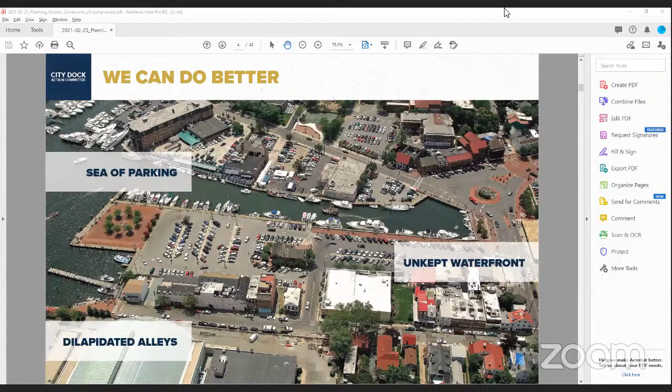We are using our resources, that is Hillman Garage, to construct a long overdue infrastructure to protect us for decades. I think my only regret about this is that the project managers and construction keep getting younger and younger than me. But other than that, I really look forward to you meeting the team. And thank you again, Eileen, for putting this together.

Oh, Ellie, thanks so much. Yeah, it doesn't, I have to just say, it doesn't get better over the years. Everyone gets younger. So Robert really set the stage for us.

When the City Dock Action Committee came together, which was less than 2 years ago, the first thing everyone did was we took a look at City Dock. And as you can see from this image, we said, this is our 100% corner. Look at it. It's a sea of asphalt. It's a parking lot. It's an unkept waterfront.

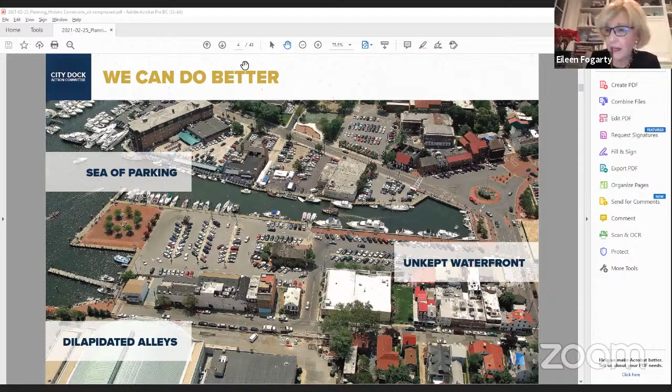This is the ongoing and increasing flood risk to downtown. In 1969, there were less than 4 flood days a year. By 2013, there were 38. In 2019, 52 flood days a year where downtown was impassable. And by 2065, we anticipate that it will be every day, 365 days a year. So this was a call to action for all of us because the situation is urgent.

The city no longer can kick the can down the road. Next slide, please.

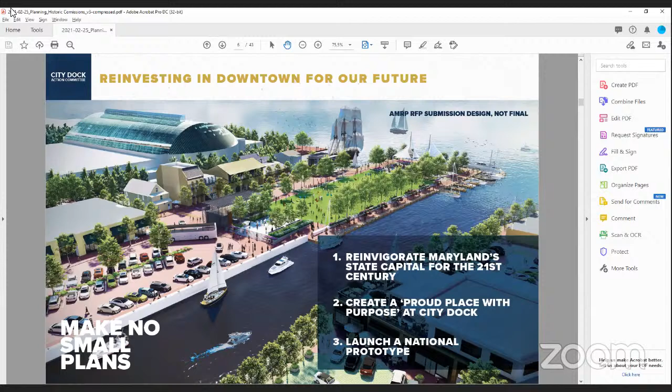It was interesting because in the past there have been a lot of groups that have done good work, but it has never gelled. I think the combination of the challenges that the City Dock group was faced with, people embraced that and said, this is a challenge, but it's an opportunity. It's a real opportunity to reinvigorate our capital city and create what would be a very proud space. So it was out of that energy, which dates to a little less than 2 years ago, that the whole effort got underway.

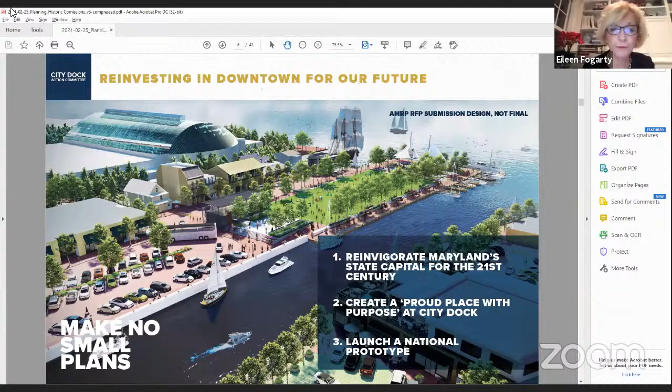I'm sure many of you have heard or been involved in this effort. The purpose of the City Dock Action Committee was very clear: create a broad-based consensus throughout the city for the future of the City Dock and identify clear actions rather than a more conceptual plan—a clear path forward.

92 citizens, business people, financial experts, preservationists, resiliency experts, parking experts, and maritime interests all came together and spent a very intense 8 months. During that time, they not only met with their own working groups to come up with specific recommendations, but there were also 22 meetings in the community, so much of the business and residential community in our historic district came along with them.

The whole effort started with ULI saying, here are some general things, a general direction. When the action committee got together, they identified guiding principles. I'll mention two: number 1 and number 4. That is, to enliven the entire pedestrian experience by creating an inviting green space with access to the water, and, very importantly, to preserve and enhance downtown Annapolis's maritime heritage, its authentic character and view sheds by honoring the existing building envelope and the maritime focus.

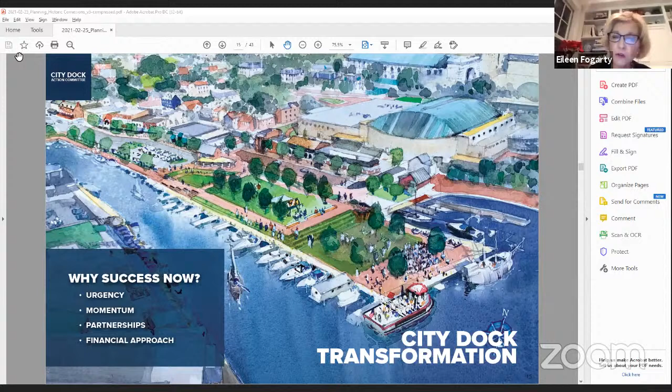The momentum that came not only from all of these people on the City Dock, but from the outreach—the 22 community meetings, the engagement, the partnerships. Historic Annapolis and the Park Service have been terrific through this process, along with the Naval Academy and Anne Arundel County, and having financial experts on this group to help set a direction and identify a resiliency financing authority for the future.

So with that, I want to turn it over to Bryce. Next slide.

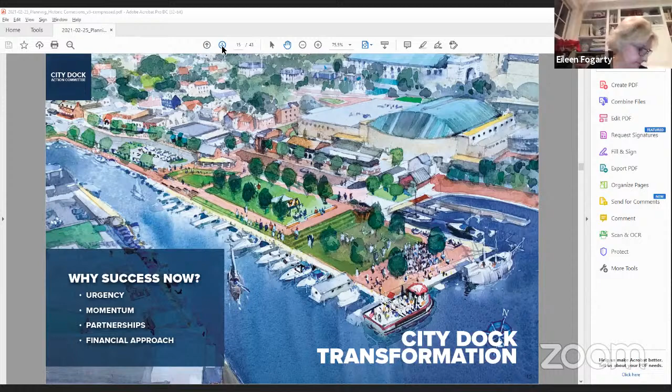This is very exciting, we're getting very close. We're in the early days of a very long process, but we've made incredible progress already, as Eileen outlined. This diagram on the screen is kind of our consensus plan, as we like to call it. It's not really meant to be a site plan, but it does represent a lot of thinking from a lot of different people. While I had the honor of being on the ULI technical advisory panel, I also got a chance to work with the action committee, and I co-chaired the design committee along with Leo Wilson. We had a lot of great folks on that committee: Michael Dowling, Chris Shine, landscape architect Jay Graham, and Michael Beatty, a developer who lives in Annapolis. Some really great thought came out of that, and a tremendous amount of time was put into developing this plan.

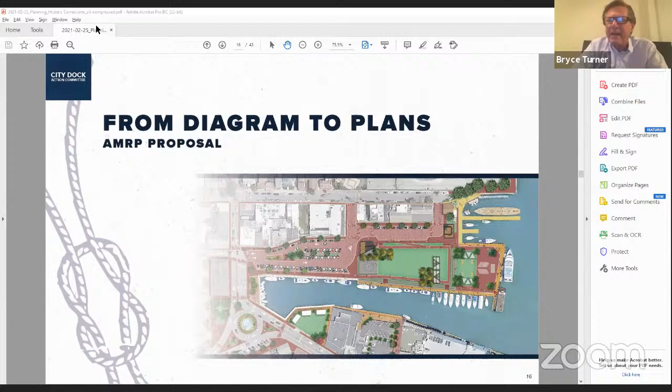Next slide, please. But before we talk more about City Dock, this Hillman Garage is what's going to make it all happen. This is really the trigger for making City Dock happen, by getting a more efficient Hillman Garage, one that can house more cars. This existing garage, I think we'd all admit, is near its useful life. It's an eyesore, and probably becoming somewhat dangerous. It's about 3.5 levels, I think 425 cars currently, and we need to get that up to about 575 cars approximately.

Next slide, please. One of the things we noticed very early on was along Gorman Street, the side closest to Main Street, is that we have the opportunity maybe to activate this facade in some way. This was at the challenge of the city. We were trying to think of ways to adaptively reuse this building, whether it's 5-10 years from now where these could become storefronts, or whether it's on weekends or times when the legislature is not in session, we could create flea market space, or food market space. There's an opportunity to do more there - it could be an art festival, art in the alley, if you will. So we're looking at some ways to activate the street. This was a very early design that was part of the proposal.

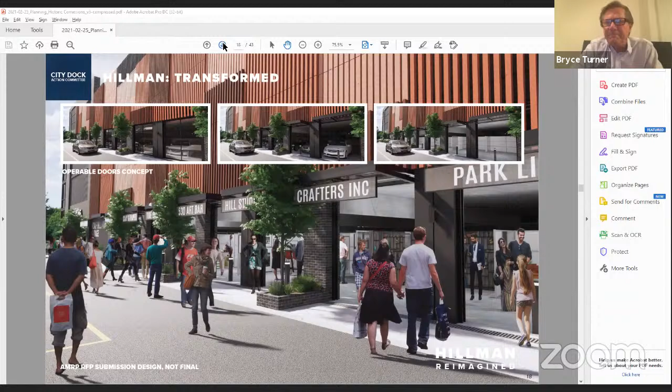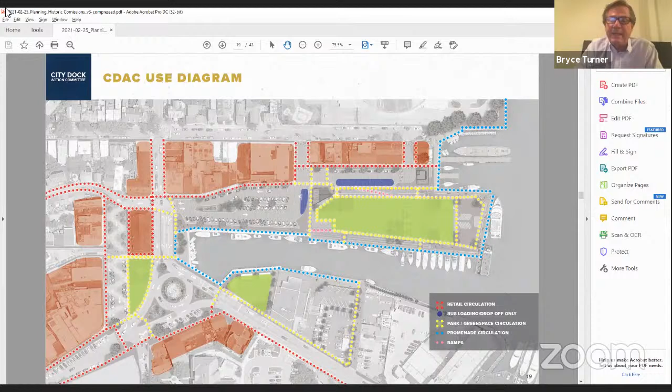So that promenade we felt was very important to be extended the entire length of the harbor, every bit of waterfront possible, and even hopefully being opened up at the Fleet Reserve at some point. We also thought about the pedestrian circulation from the Market House along Dock Street, along storefronts, and how those could be improved. But also thinking about how a green park that is elevated to provide the major flood barrier could also be an economic development tool for this community, and really start to leverage investment in some of the adjacent storefronts that really need it, quite frankly. Next slide, please.

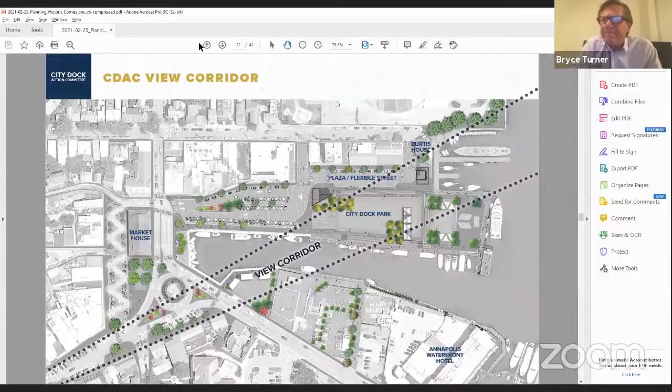Next slide. And this is the Sanborn map, 1897, where you start to see some of the structures that were there previously.

We think there may be an opportunity. One of the things that we kicked around in the design committee was whether or not a skeletal remnant of some of these older buildings could provide a frame structure for shading. So those are some of the things that we're studying.

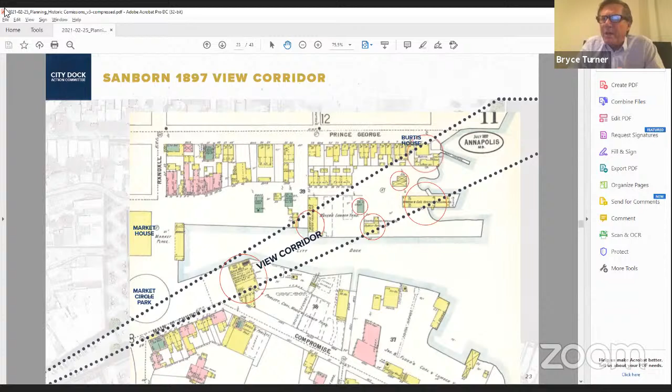Next slide. So this was the plan that AMRP developed as part of the proposal process. And of course, this is done somewhat in a vacuum, but we had the tremendous opportunity of building upon the action committee's work. So obviously it's not very different at all from what the action committee had developed in the consensus plan.

The major components of this, of course, at the very top right, you see the Burtis House labeled B. Just below that, label L, would be the adjacent building that would tie into the Burtis House in some fashion, as has been recommended by the recent report that's come out, and could have some harbor master functions in it. And it mostly is for viewing, of course, the harbor. We think this vantage point is a good one.

Moving on down the plan at label H, the Susan Campbell Park becomes modified in some ways and renewed. The elevation is brought up a little bit, maybe an opportunity, a better opportunity for some shading there, and games and programming, and the ability for people to walk to City Dock and dip their toe in the water, if you will, which is something we heard throughout the entire process.

The major function at the park, however, will be just that, an open park shown here as F, which will allow the boat show to continue its operation throughout Susan Campbell Park and the Green Park. We have the opportunity for some bus drop-offs for the boat tour functions that are happening there.

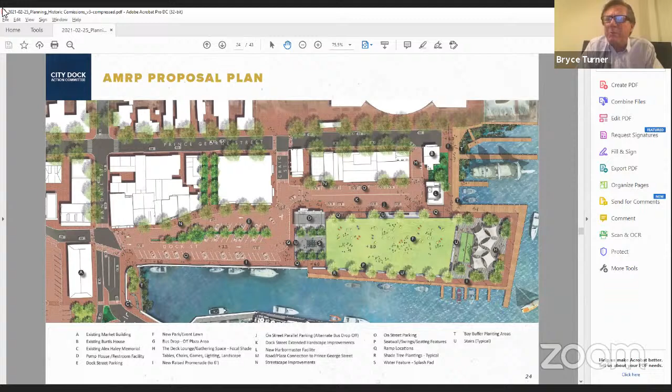That is a good part of the nuisance flooding that we have actually comes up out of the drains from below. It's not actually coming over the bulkhead, but in some cases under the bulkhead and up through the drains. And this will be a place where we can locate those pumps. Next slide, please.

And so when you really view this in 3 dimensions, and especially from this vantage point from over the water, you really see obviously that sea of asphalt. And so it's going to be a really no-brainer, we think, to make the kind of improvement that you get when you look at this next aerial on the next slide.

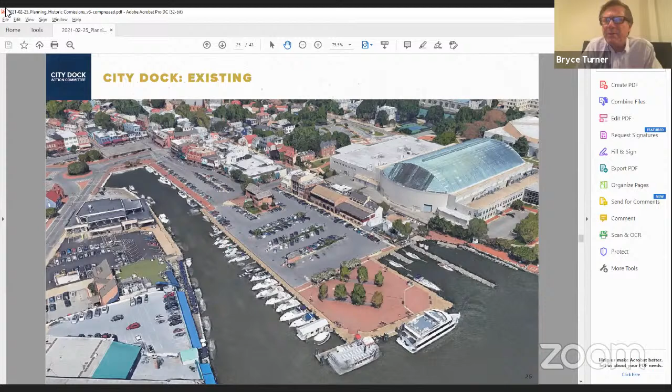This starts to give us the opportunity to keep the existing slips that we have there, but to get an incredible green space that will be elevated approximately 5 to 6 feet above where the existing surface parking lot is, especially closest to the water, which will give you an even better view out over the water. We think it's going to be very exciting.

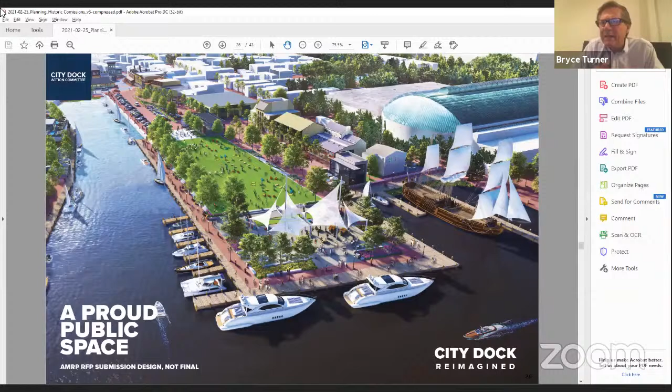Again, I think some shading is going to be needed here. The promenade will be enhanced along its full length. In this image, you can see the Burtis House on the right near the Naval Academy, and some type of structure that we would build for the harbor master adjacent to that.

We think that this incredible view that people are going to still have when they arrive from Main Street will really be enhanced by the green surfaces that they see, the additional brick that we would be including. This particular slide shows some memorial circle and some potential changes there, although that's currently not in our scope of work, I want to point out.

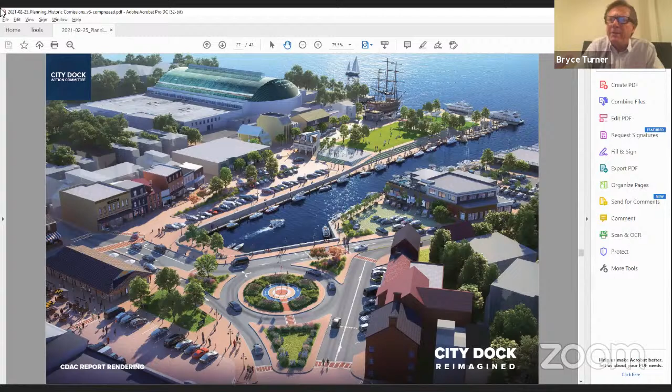So as we drill in a little bit closer, you start to see a fountain, potential splash park that a lot of people felt strongly about on the action committee. You start to see some of the steps that raise up to that green elevated park. And there, although you can't really see in this image, some enhancements to the bulkhead on the lower left side of the image.

So the pump house and the restrooms will be a small portion of the existing Harbor Master building. The thought was, because of the incredible amount of utilities that come into that building that largely help the boat show, we would keep one portion of that building and repurpose it for the pump house and for toilets, and then possibly have an upper level viewing deck on top that could be used for some small functions.

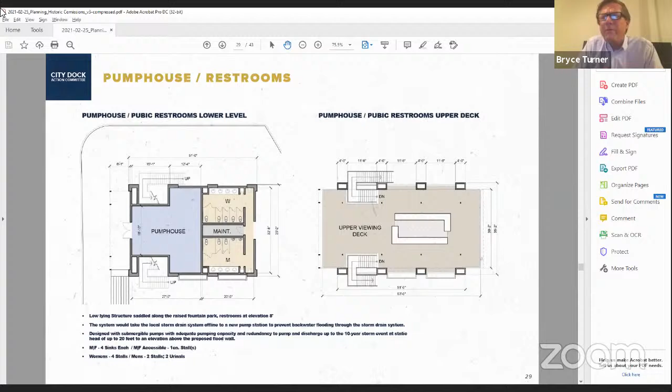And just looking back at the other direction, we want to keep this building very light and airy as much as possible with some proportional scaled openings.

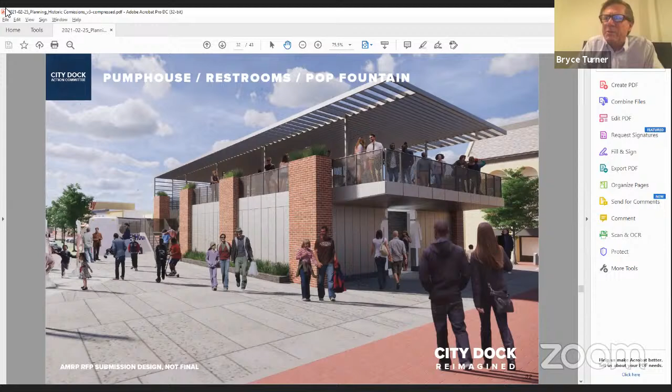And one final view of that, looking back towards Market House. Again, you see the opportunity for some type of second level observation deck there that I think could be very interesting, as well as the entrance to some public toilets, which I think are very important at City Dock, and any successful urban space really needs those public facilities.

Next slide. And then this is an image that we created for the Harbor Master building, which would sit adjacent to the Burtis House. My guess is the design of this is going to change considerably probably, but again, brick and steel and being as friendly as we can to the Burtis House, but making sure that no one mistakes this for a historic Annapolis building.

So those are some of the studies that we've done. This will be the work that we have in front of us, is to develop these designs, to work with HPC and the city throughout this process. Again, we're very excited to be doing so. And I believe that's my last slide, Eileen.

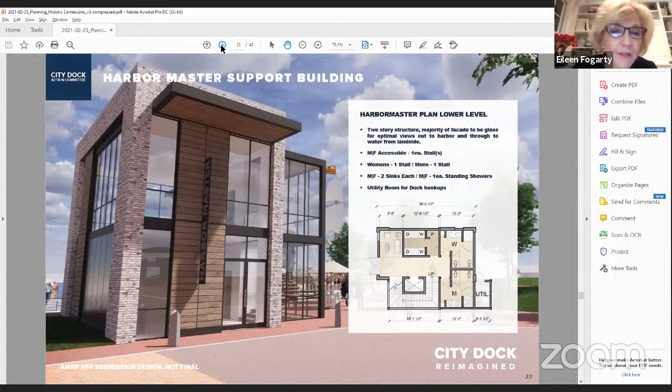Before you all get to meet Eivind Dueland, who you will enjoy working with as much as you have enjoyed working with Bryce Turner, I wanted to just give the commissions some background on how we hired AMRP. Starting in the summer of 2019, there was a very rigorous process put in place, a competitive process for RFQs, RFPs for Hillman and City Dock. And nationally, 5 nationally recognized firms competed in that process.

Out of that, last summer, 2020, AMRP was selected. As soon as they were selected, the city brought on a group called CBRE, a highly regarded contract management and contract negotiation firm, and they worked with the city and AMRP to bring forward the pre-development agreement that is in place now.

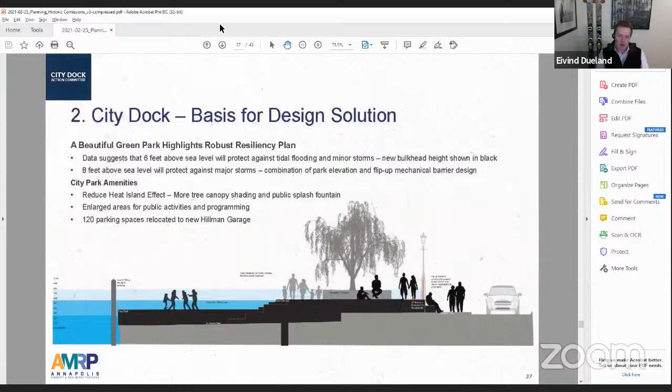The other thing that we want to do is ensure the parking spaces that are lost at City Dock are then picked up at the new Hillman Garage.

Just as we're developing the designs for City Dock, we're further developing the designs now for Hillman Garage. What we will be doing here is developing a design that fits within the existing footprint of the current garage. As I mentioned, we'll pick up the parking spots lost. We want to keep the vehicular entry and exits as they exist today, both on Gorman and Duke of Gloucester Street.

We're excited about how the ground floor and other parts of the facility can be used for other purposes for the garage during certain periods. Pop-up vendor and artist space, as Bryce mentioned, is something that can definitely help reactivate Gorman Street in particular.

We're also undertaking a parking study to outline the demand and need to right-size the garage facility, and to understand the parking dynamics in and around Hillman and the City Dock area as a whole.

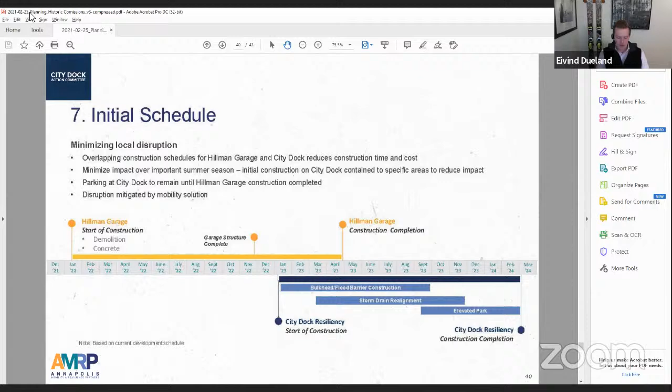We just wanted to give a brief overview of the process we're going through in the PDA process now. We're in what's deemed the feasibility review, which is further developing the designs and solutions that we did as part of our initial proposal, studying the parking demand, and doing some initial review and further development of the financing plan, before we then define the program and start the more traditional project development, narrowing down the design solutions and estimation of Hillman Garage and City Dock.

The reason I wanted to bring this up is while they are two different projects, and Hillman will be running a little bit ahead of City Dock, as you just saw from the schedule, they are very much interlinked when it comes to revenues from Hillman Garage, which will be used to develop and construct City Dock. So they're very closely linked in a symbiotic relationship. We're completely dependent on putting some parameters around Hillman so we know what we can do at City Dock, both from a scheduling standpoint and a cost standpoint.

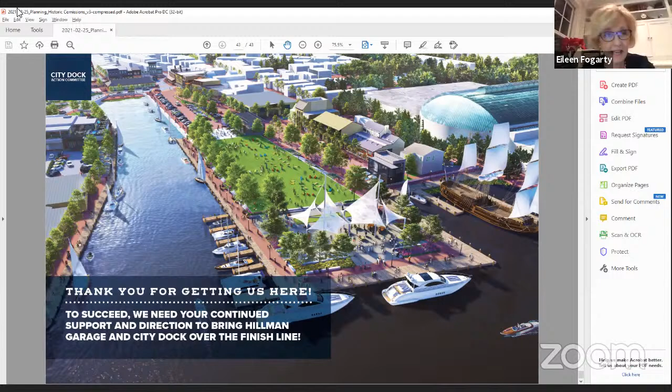Yeah, well, thank you, and hi everybody again. Obviously, as an old public works guy, this is a very exciting project for me, so we can't wait to get started. Thank you for inviting us to the meeting tonight and for having the joint meeting. I think this is a great format. What a great team we have. Thanks, Eileen and Eivind and Bryce. Your presentation was superb and we appreciate that. We think we have the right team. We think this is the right project. Now we just need the public to give us the input we need for the design of the project.

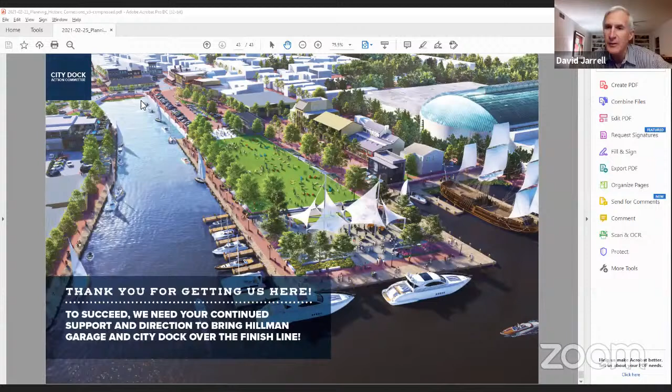But we're really excited to get moving. As Eileen mentioned, this is the very beginning of it. We thought it was important to come to you all to get you up to speed on what's happening, because you're going to see much more of this project in the future. But we're just really excited, and hopefully we'll have a chance to answer some questions if you have any, but I'm sure Eileen will turn that over to you in time. So thank you.

Okay, Eileen, are we ready for some discussion, some conversation? We are ready. All right, great. Who wants to start? I could make maybe a suggestion - our guests from the Planning Commission may have questions, and excuse me if I'm misrepresenting, but you're at a higher level of planning than we are at the HPC. We tend to be very single site oriented, so this is a big project for us, master planning. But I'll turn it over to anyone from the Planning Commission who'd like to ask questions. Mr. Chairman, may I? Yes, of course. Well, you've been there, so you tell us. Well, no, I'm not going to do that, but they've already had a shot. Just saying. Okay, well, warning you about certain members of the Planning Commission, really. Well, I'd still like to extend the courtesy as our guests. I'm just kidding. Okay, good enough. Questions from anybody on the Planning Commission?

I'll jump in first, if no one minds. One of the things we talked about at our last meeting, when we were briefed on March 5th - we did that in person, if you recall, it may have been one of our last meetings in person - one of the things I mentioned was enhanced facilities for boaters. I do a lot of sailboat cruising, and one of the things that's really important to me when I get to a new city, especially with a nice seaport, whether it's Mystic or Maine, you really like to get off the boat and take a shower. I couldn't help but notice there's one shower stall for men and one for women. So is that just the initial idea? You will be enhancing this, correct?

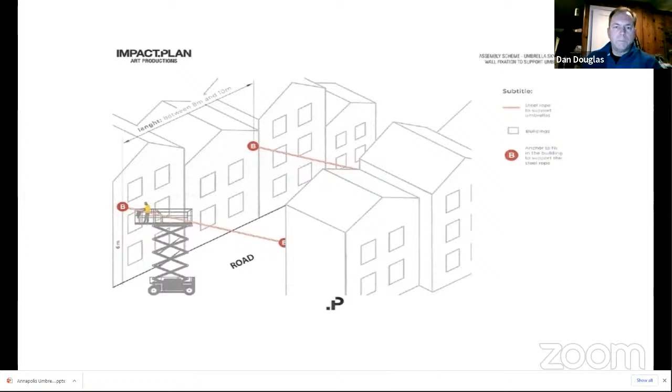So the wires - there are going to be 7 wires spanning across, and then there are, I believe, at least 11 wires that run the length of Maryland Avenue. The challenge is to find suitable spots to anchor the 7 cross wires.

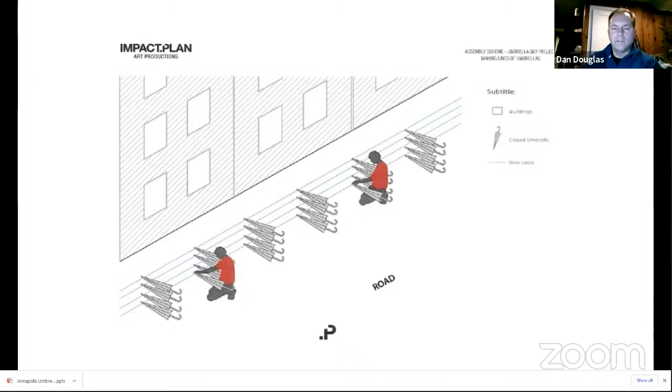This is simply a diagram from the vendor showing the process of installing these. They provide all of the parameters for the distance between the longitudinal wires.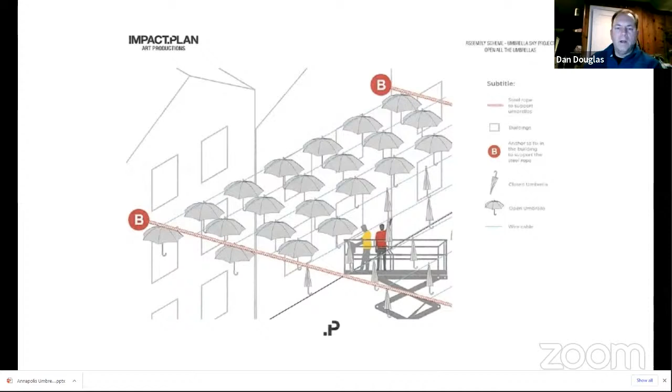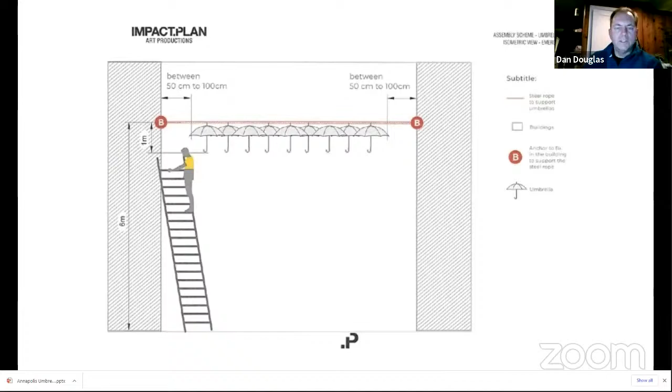The height of these wires is also controlled in this case by fire safety needs. The fire department needs 14 feet of clearance underneath these umbrellas. The umbrellas are 3 feet tall, so the wires will be at least 17 feet off of street level. There's a diagram of that, and obviously it's in centimeters.

In this slide, you can see the solution to the need to quickly remove this installation in the event of a fire. The solution the vendor provides is to simply cut the wires. We talked to the fire marshal a couple of times about this, and it's not that the fire department can't do it, but it's going to take some time to get a ladder off the truck, get it positioned, and bring the ladder up between wires. It would take a fair amount of time to cut 7 wires, or at least enough wires to drop this to the street and drag it out of the way.

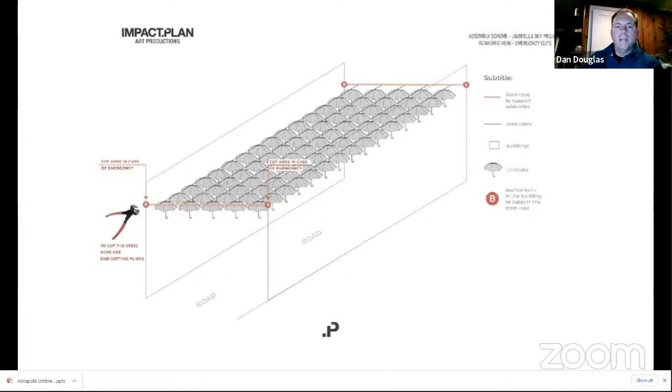This is what they consider a quick release system - what's provided by the vendor if you allow them to install every detail. It's simply a carabiner clip. But again, that requires getting a ladder and getting access 17 feet up in the air, and the fire marshal is not comfortable with that.

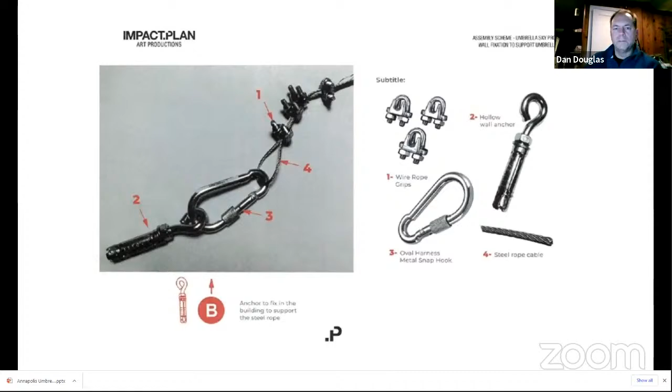The 7 cross wires - the arrows in this diagram indicate the anchor points. You see that every anchor point in the diagram is on the side of a building. We're planning to anchor not to the front face of a building, but to the side, for two reasons. The strength of the anchor point will be better if the fasteners are perpendicular to the direction of pull - it's much harder to pull something out perpendicular than if the fasteners were parallel to the wires. So the challenge has been to find locations on the sides of buildings where we can anchor with access and at the right height.

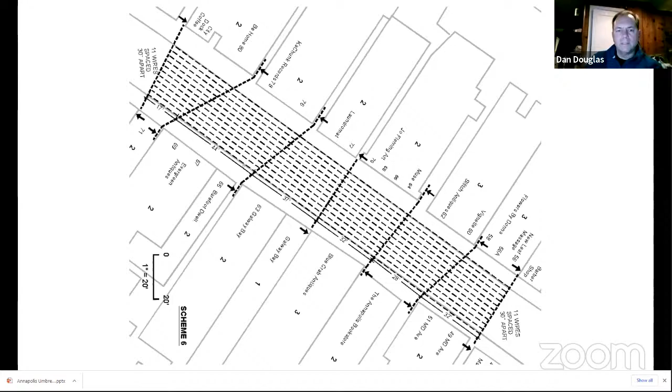We're going to, as soon as we can, do a test run of these - get the fire marshal out with a pike pole and see how easy it's going to be to actually quick release these and drop them into the street. This is a simple diagram of the concept I'd like to try in our test. The bar has at least 2, and we're probably going to expand that to multiple potential anchor points.

We'll be looking primarily to anchor into the corner post of the building on the side. If we can't anchor into a corner post, then we'll look for the first available stud. But in any event, these are not going to be anchored into just siding. They're going to be anchored into structure.

And then you've got a simple pulley wheel that the wire crosses over. The spring will be a pretty heavy duty spring that will provide just enough movement that the pike pole can grab the ring at the bottom and give it a sharp tug, pulling it over the bolt and releasing the system down into the street.

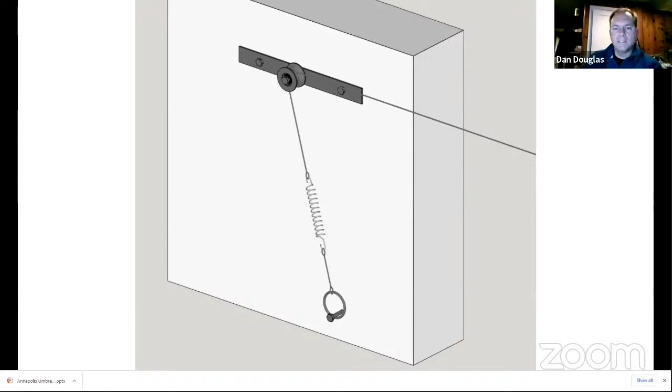Next slide, please. I'll let Anthony take over from this point.

So we've been talking about this project for some time now in the community, and Joanne Vaughan at the American Federation of Art has just offered a letter of support for the art of the event itself. This would create an art exhibit basically, and we've had their support, and they're hoping to raise some money for it as well.

You want me to conclude, Dan, or do you have any more? Go ahead. So this is the project, and the next slide will bring us back to the beginning slide of Maryland Avenue with that image in it. I've had so many great comments from everybody I've talked to about it, from the public, everybody on the street, and anybody I've tried to show it to. As a piece of art, it's very minimally invasive with regard to the buildings itself, and we'll maintain that objective.

And it's a temporary structure. We hope to install it, depending on how everything aligns this year, during the summer months. I'm looking really for 90 days to start it as an attraction, and then it would be removed. With that, I'll conclude with the Annapolis project and open up the questions.